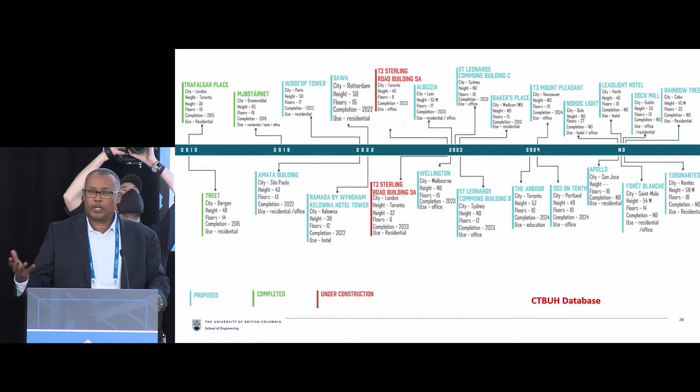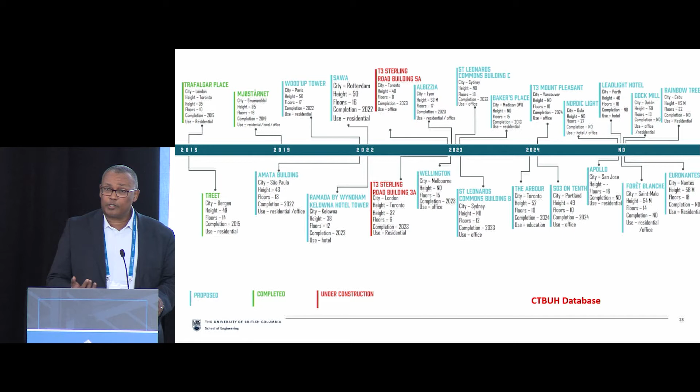I know this is something that is continuously changing, so the concept of tall building is evolving. This is something we have started with 6-story in Canada, and then pushing the limit to 12-story now. And with the research we are undertaking, we're trying to push it to 20 stories, importantly, more being in a high seismic zone. This is an exciting time to be in.

The deal breaker - I think FP Innovations should be acknowledged. When they pushed that CLT handbook, it's been adopted in the States - that was the deal breaker.

And then in Canada, also a number of different demonstration projects were done with this type of timber and steel hybrid structures. So the first project that we undertook, we were looking at steel moment resisting frame with CLT infill. What we realized from this type of analysis and work is the CLT infill does indeed contribute significantly to the lateral resistance.

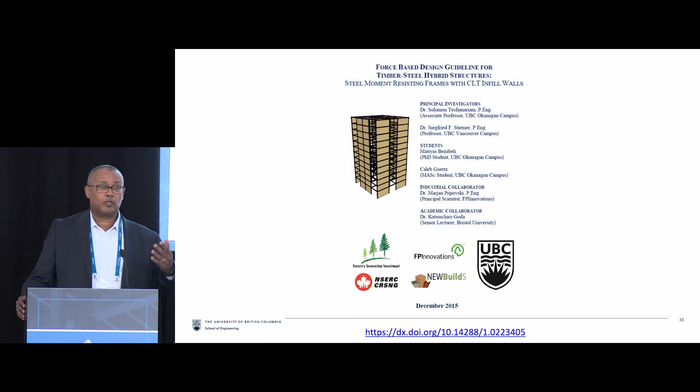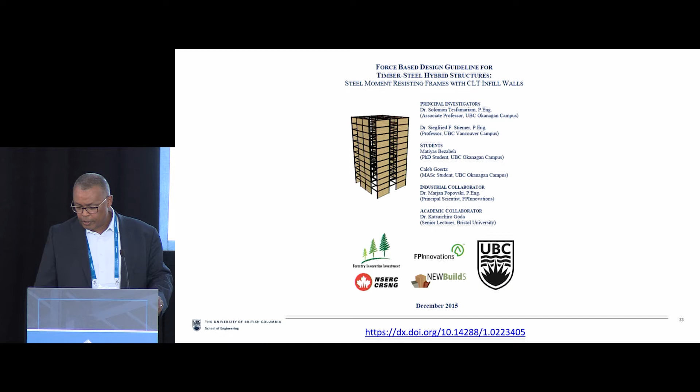Then we needed to develop what type of design, as Eric showed, that overstrength and ductility factor as per the Canadian code. So what code would you use if you have to use this type of hybrid structures - would you follow the timber code, steel code, or NBC, where we take the conservative R0RD factor? That was sort of the driving factor why we pushed this type of hybrid structures.

From our analysis, we're using nonlinear time history analysis, looking at 3-story up to 9-story for this type of structures. Then we identified what is the appropriate R0RD factors. For this, we strictly followed the FEMA P695 detailed nonlinear time history analysis method to derive these.

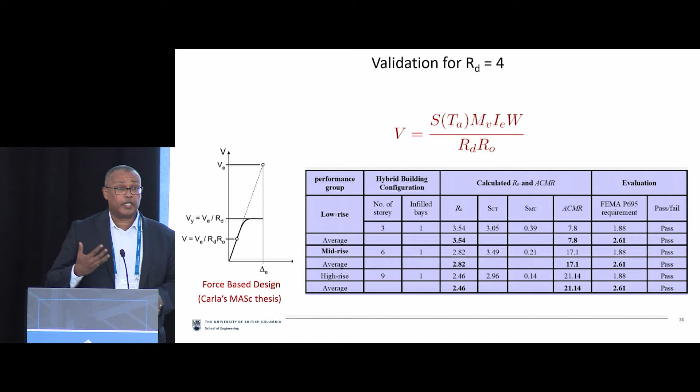One important factor that came from this research, that's not even part of the code, is that the R0RD factor is period dependent. Most of the code we have now, we have an R factor of 8. But that R factor of 8 for a 2-story structure versus 6-story, 12, and 20 will have different implications. So that's one of the recommendations from this project - we need to come up with R0RD factors that should be period dependent.

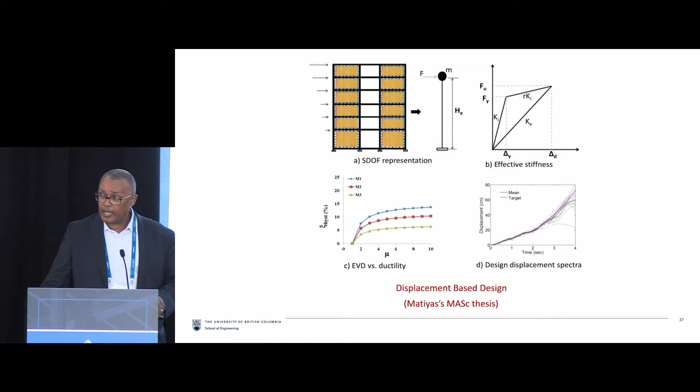With this, we looked at also displacement-based design as part of performance-based design, and then also looked at energy-based design to design this type of structures.

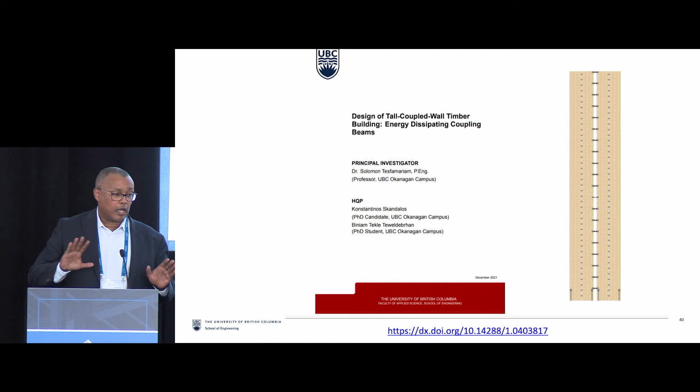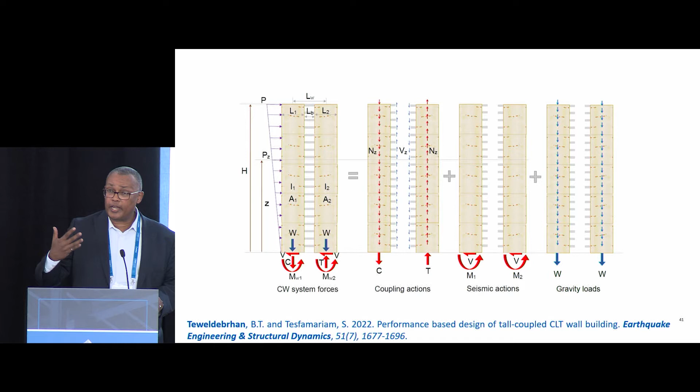The next project that we looked at is to push the limit up to 20-story. So instead of now conventional shear wall building, now we're using shear wall coupled with some type of innovative dampers - those type of replaceable shear link. And the demand on the hold downs is significantly increasing, so that connection became the bottleneck, the critical factor. For this type of structure, then we proposed beyond that replaceable shear link to use the concept of BRB.

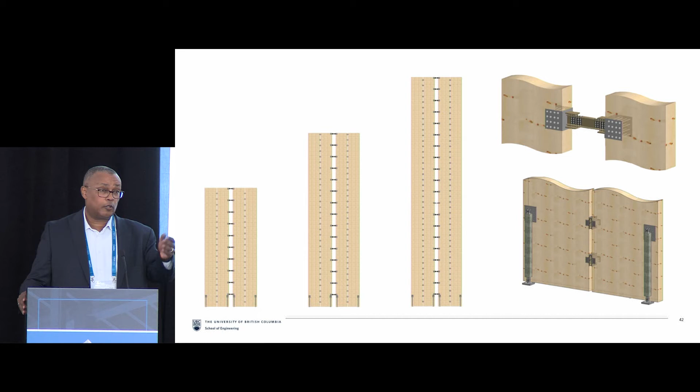I'll be happy to let you know that recently with Dr. Thomas at UNBC and CoreBrace with Brent, we have done testing. So in a future presentation, we'll be reporting the data that we have.

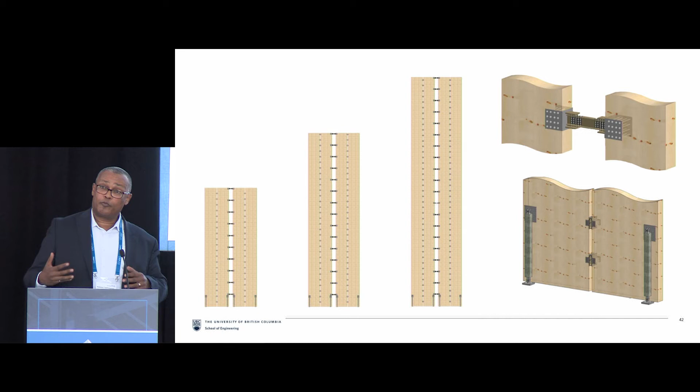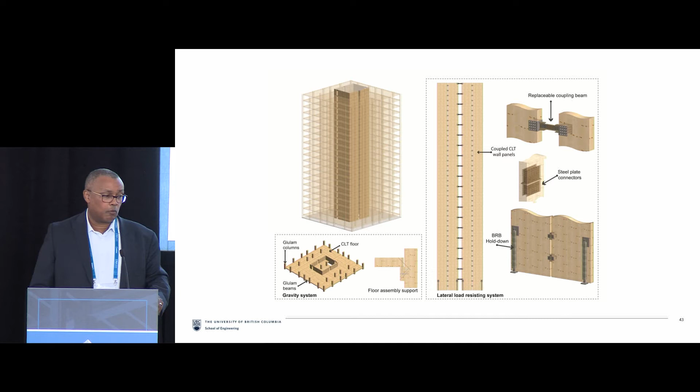From the conceptual design and implementation, we took it to detailed performance-based design for this type of innovative systems. One critical factor when looking at this type of system is the damping factor - what damping factor do we use? For the most part, there's a very conservative damping factor that we are using. But with this more innovative system that we are introducing, what damping factor should we use? That's part of the big design uncertainties that we have, like for wind and earthquake type of design.

With this type of tall structural and hybrid system that we have noticed, seismic isn't the only important factor anymore. With a hybrid system we have a more efficient, lighter structure, so wind also becomes an important factor. Even in a high seismic zone location, wind will become important.

So the design approach we're looking at now is sort of siloed. There's performance-based design for wind, performance-based design for earthquake, and so forth. We have to look at it more holistically, a performance-based design that accounts for multiple hazards. Even bringing in fire, so earthquake, wind, and fire becomes a performance-based multi-hazard design framework. The design guidelines and approaches we have are taken in silos. That's the next phase of the design process, to bring these different elements together and find the best alternative design that satisfies the requirements.

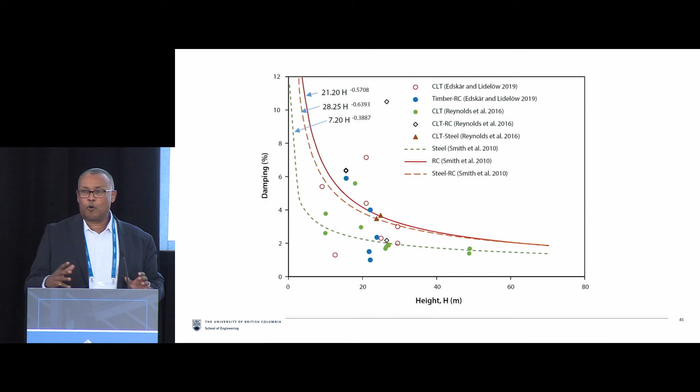Another important factor that, from a timber industry design point of view, we don't usually look at, is soil-structure interaction. As we start pushing building height, soil-structure interaction will become a very critical design component, affecting the response of the structure. The more we make it lighter and more flexible while pushing the building height limit, more design factors and questions come into the picture that we're trying to address, that I don't know the answer to at this point.

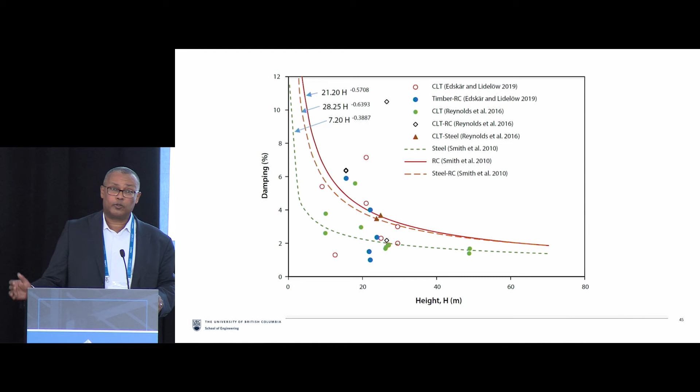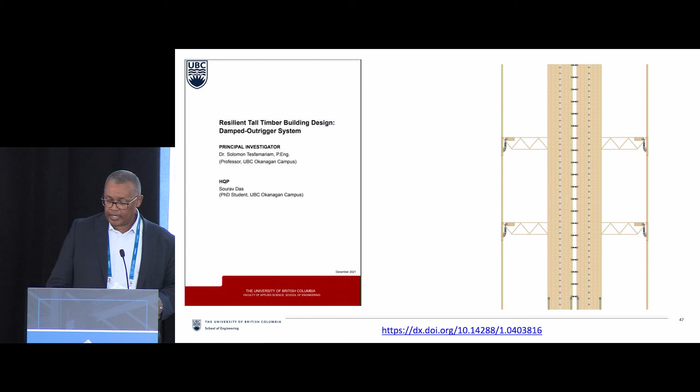Once we finished that coupled wall project, the next thing we looked at was using outriggers as a concept. With this outrigger system, the outrigger beams connecting to the exterior columns are connected with energy-dissipating dampers using shape memory alloys. This has good recentering capability, contributing to resilience post-earthquake with very small residual drift. Part of our work on this system is trying to optimize and find the best location for these outriggers.

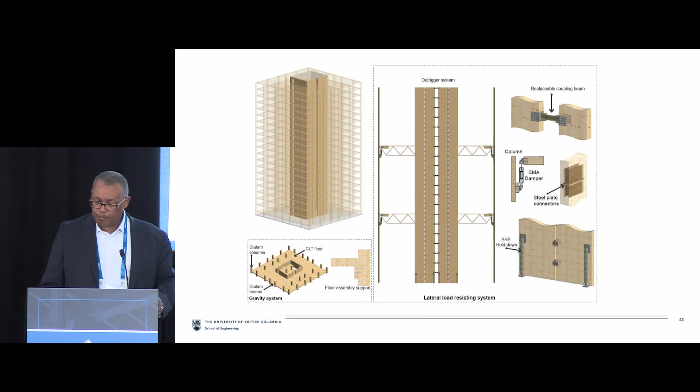For this outrigger system and coupled system we have, we use mathematical models as a surrogate model, and then a detailed finite element model to verify and find the optimal location of that outrigger.

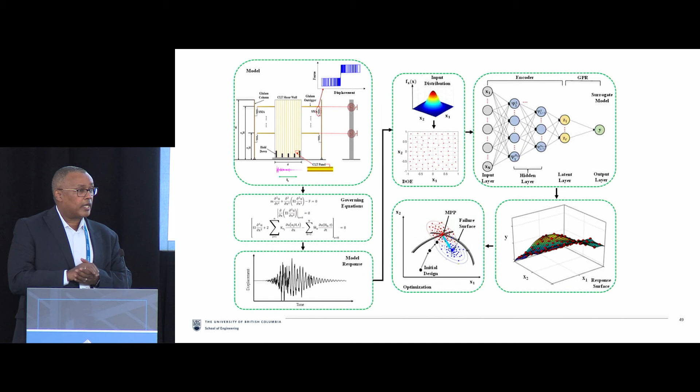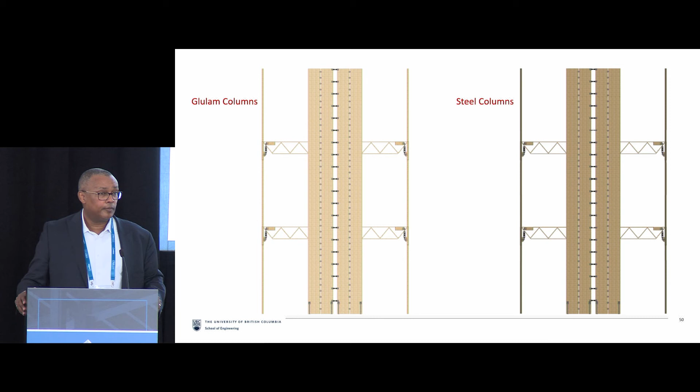One issue coming from this outrigger structural system is that our exterior columns will now be subjected to extra axial load. So instead of columns made out of glulam beam, we have to start using steel structure, or look at a belt outrigger system to distribute the load. The more we try to find solutions, the more questions we have that we haven't answered yet.

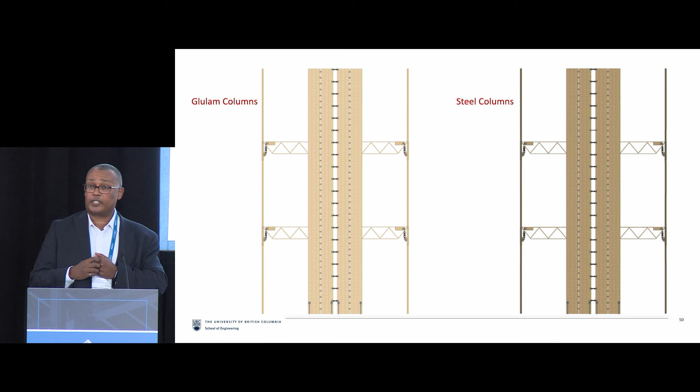But the concept of the outrigger has been applied extensively to different types of structures. I feel bringing this concept to steel-timber structures will help us push the building height limit without compromising safety.

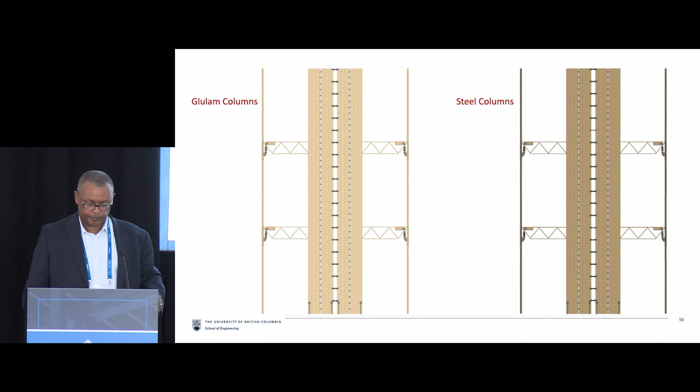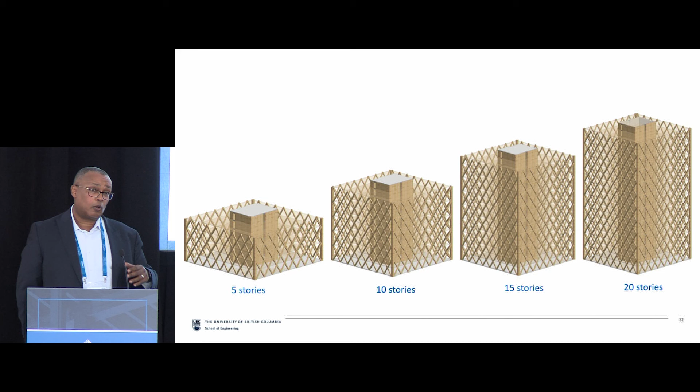Finally, I'd like to share my thoughts. Currently what we're working on is trying to bring structural functionality and aesthetics into our design process. We've seen a number of different presenters, and a number of these diagrid structures have been constructed. So when we look at this structure, we're looking at it from 5-story, 10, 15, and 20 stories.

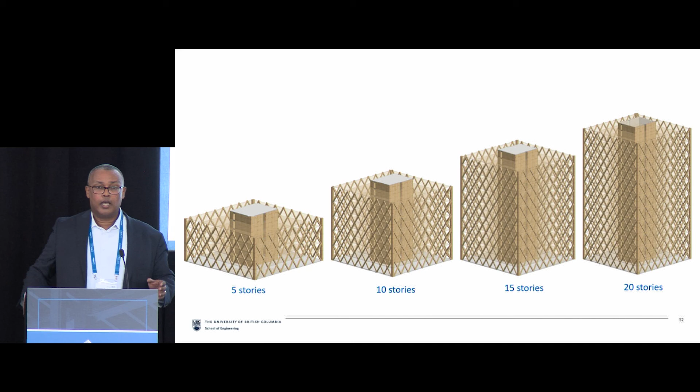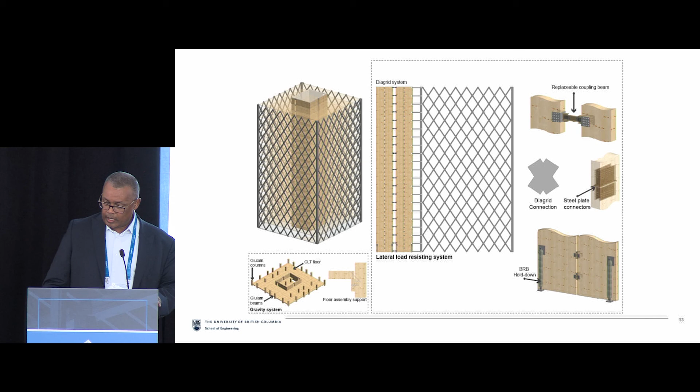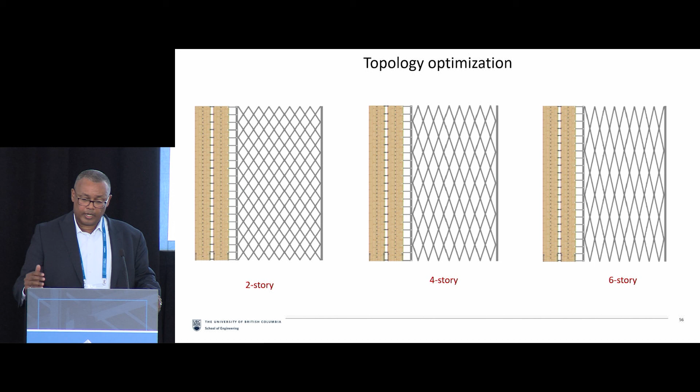So we're initially using pure timber only, or optimizing to find the right balance between timber and timber diagrid, between a steel core with timber diagrid, or a timber core with steel diagrid. We're also optimizing the diagrid spacing, like every 2-story, 4-story, 6-story, and so forth. That's part of our current optimization and design process, trying to develop within this performance-based design criteria to push the building height limit while in a high seismic zone, meeting aesthetic requirements to make those buildings more attractive.

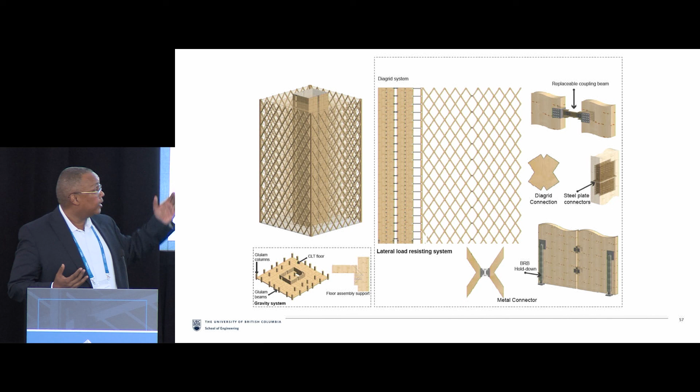In addition, with this outrigger-diagrid system, by breaking the coupling beam in the middle and introducing some type of slit damper, we can contribute additional seismic resistance and additional energy dissipation, which is important.